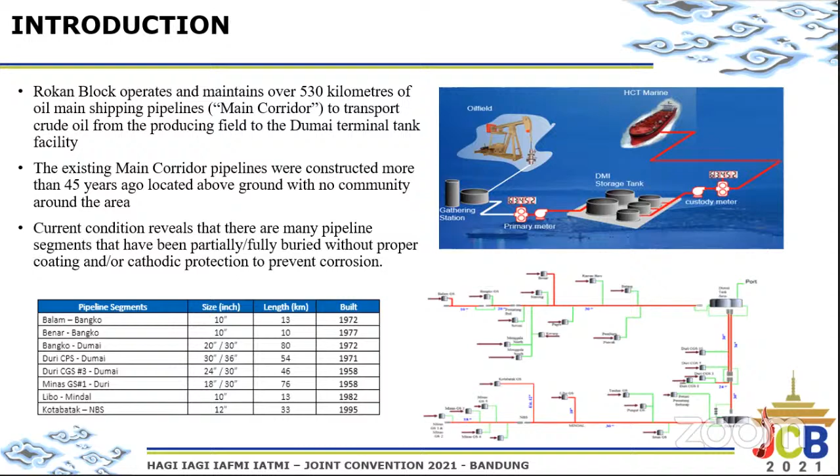A specific problem discussed in this paper is pipeline integrity and operational issues in the main shipping lines. The first is aging pipeline networks. The pipeline is more than 45 years old, as stated before. The second is heavy metal loss due to external corrosion from environmental and soil contact. The third is illegal road crossings. Another problem is pipeline incidents from public road proximity and natural factors, such as land shift, fallen trees, and

erosion. As part of further pipeline integrity problems, inline inspection or ILI and long-range ultrasonic testing or LRUT were conducted on the existing aging pipelines to be used as baseline data. The results indicated some pipeline segments were at high risk due to significant metal loss. We can see in the picture some conditions of the main corridor pipelines: pipeline leaks due to illegal road crossings, corrosion, and also encroacher houses or facilities near the pipeline.

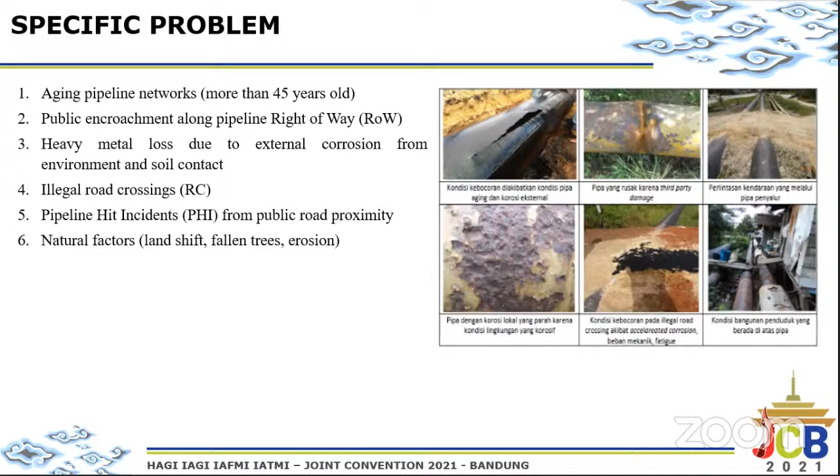With the problems described in the previous slide, by considering the inability to perform full pipeline replacement during the remaining time of Rokan PSC at the time, the Rokan block operator deployed a comprehensive pipeline maintenance or CPM program, which covered all aspects of pipeline maintenance, starting from the inspection program, lifetime analysis, priority ranking, and planning to execution. The main goal of the CPM program was to maintain pipeline integrity at an acceptable level of service. The program focused on activities related to an increased rate of proactive repairs by the sleeving program, road crossing repairs and coating applications, and installing sacrificial anodes and other interim mitigation until pipelines are either replaced

or shut in. As part of the CPM program, the Rokan block operator utilized a Pipeline Integrity Management System or PIMS and implemented risk-based inspection tools to prioritize the asset integrity program. The picture in this slide shows the pipeline integrity flow process. The main pipeline integrity activities, as we can see in the slide, are risk assessment, inspection, monitoring and testing, integrity assessment, and mitigation and repair.

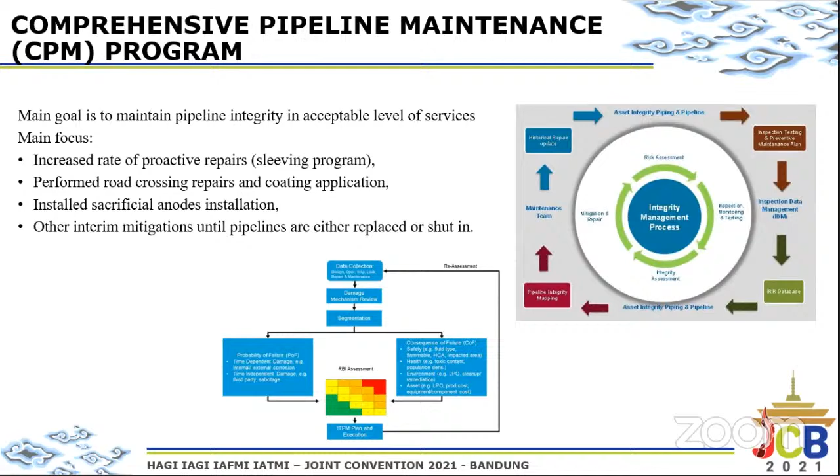This section will describe the CPM program execution. The CPM program was initiated in 2017 to allow safe pipeline operations, reduce the risk of loss of containment, and reduce the risk of social and environmental impact due to pipeline integrity during operations. The detailed objective of each program activity, the repair criteria, and highlighted results related to each CPM program activity will be discussed in detail in these sections. The first program is pipeline repair by sleeve installation.

The objective is to maintain or improve the maximum allowable working pressure or MAWP that supports safe operations. The repair criteria is to address the red and orange anomalies based on the projection of the latest inspection result. We can see in the table the pipeline anomaly criteria based on the metal loss condition and MAWP. For example, a pipeline spot is categorized as a red anomaly if the metal loss is more than 80% and MAWP is less than 1.1 MAWP limit. Total installed sleeves from 2018 until 2020 are around 4,600 pieces, equal to 1.7% of total main corridor length. And these are some pictures of sleeve installation activity.

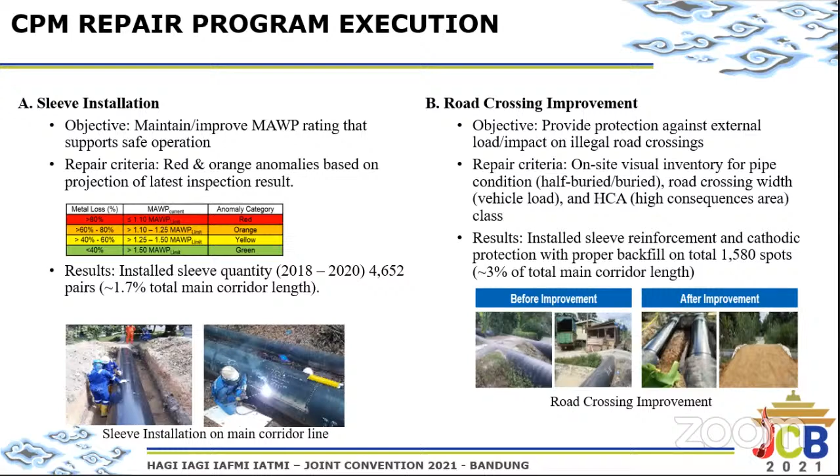The third program is coating application. The objective of coating is to provide protection against external corrosion and mitigate corrosion growth. The repair criteria is based on the projection of inspection results on buried or half-buried pipeline with 50 to 60% metal loss. Total coating application and sacrificial anodes installed until 2020 is around 20 kilometers, equal to 6.2% of total main corridor length.

This is the picture of the coating application activity as part of the CPM program.

The next program is guardrail installations. The objective is to provide protection against pipe hit incidents due to vehicle traffic. The repair criteria is criticality prioritization based on past incidents, road condition, and pipeline positions. Total installed guardrail until 2020 is around 30 kilometers.

The picture shows the comparison between before improvement and after improvement. If there is no guardrail, the truck hits the pipelines, but the right picture shows that because of the guardrail, the truck does not hit the pipeline.

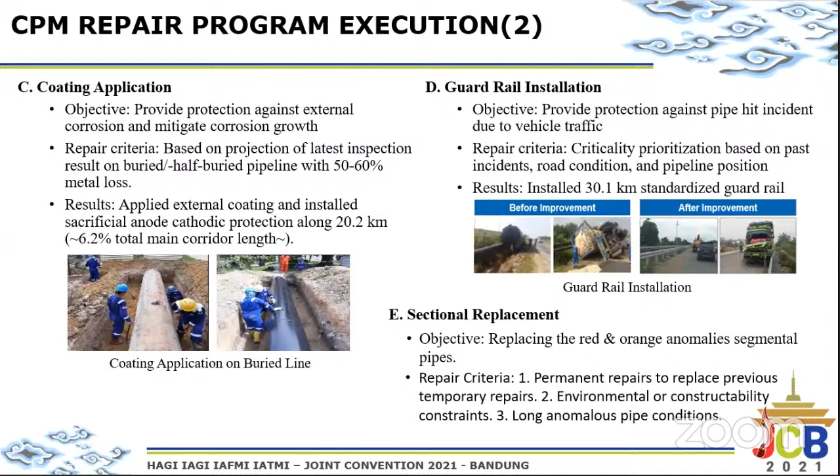This section will summarize the accomplishment of the CPM program from 2018 until 2020 in ensuring safe pipeline operations: MAWP more than MOP, maximum operating pressure, success to extend the pipeline remaining lifetime, to reduce the damage rate from pipe hit incidents, to reduce lost production opportunity, and increase mean time between failure or MTBF.

First, we can see the CPM program succeeded to maintain MAWP above the MOP to support safe pipeline operations. After the CPM program, all main corridor segments demonstrate MAWP improvement in 2019 compared with the projected MAWP without the CPM program. In addition, degradation of MAWP below required operating pressures due to aging pipeline has been avoided.

From the picture of the main corridor anomaly mapping, we can see the reduction of red and orange anomalies in the main corridor after the CPM program.

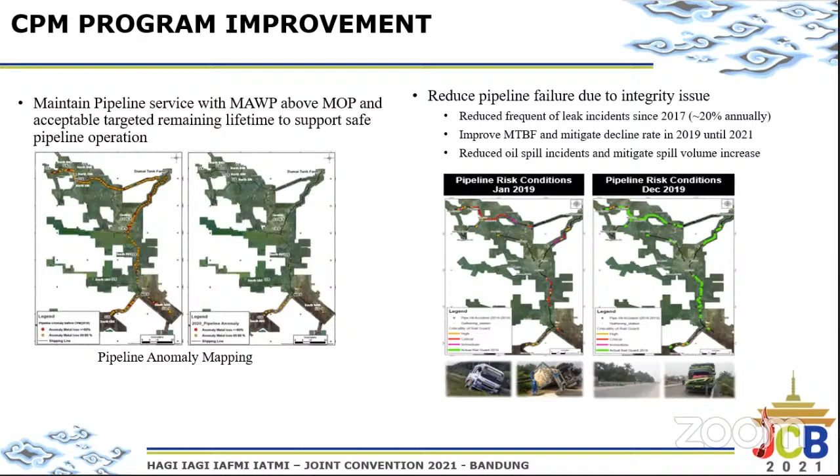This graph shows some results and successes of the CPM program. The first is more flexibility in mitigating congeal events resulting from sustained MAWP, and we can see the reduction of lost potential oil due to congealing. The right picture shows the reduction of the number of damages inflicted on the pipeline from vehicle strikes or accidents, and also reduction of associated repair costs resulting from pipe hit incidents.

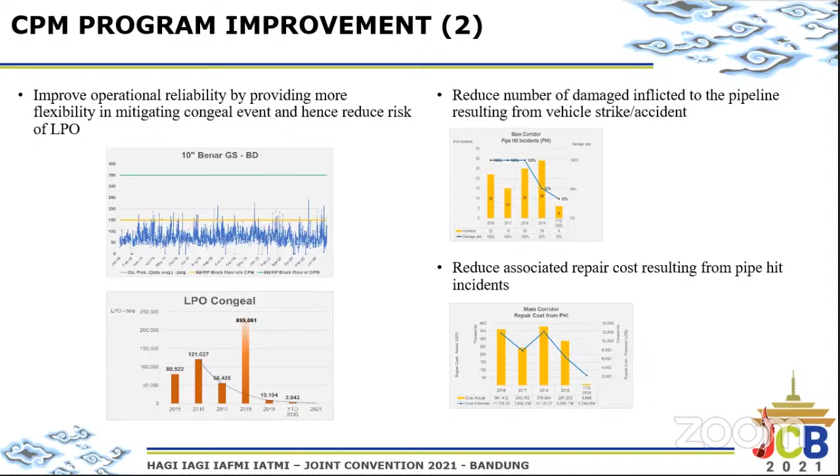These are the conclusions. The execution of the CPM program in the main corridor from 2018 until 2020 has successfully maintained pipeline operation at a safe margin, MAWP more than MOP, maximum operating pressure, extended pipeline remaining lifetime, reduced the damage rate of pipe hit incidents, reduced lost production opportunity, and succeeded to increase mean time between failure or MTBF.

The CPM program provided a fit-for-purpose solution for the aging pipeline condition, given the end of the Rokan concession, compared to complete replacement, with the following specific advantages: significant capital cost savings converted into operational cost, minimizing social risk and increasing the safety factor, preventing lost production with an even greater effect, and generating baseline improvement with good learning for future activities.

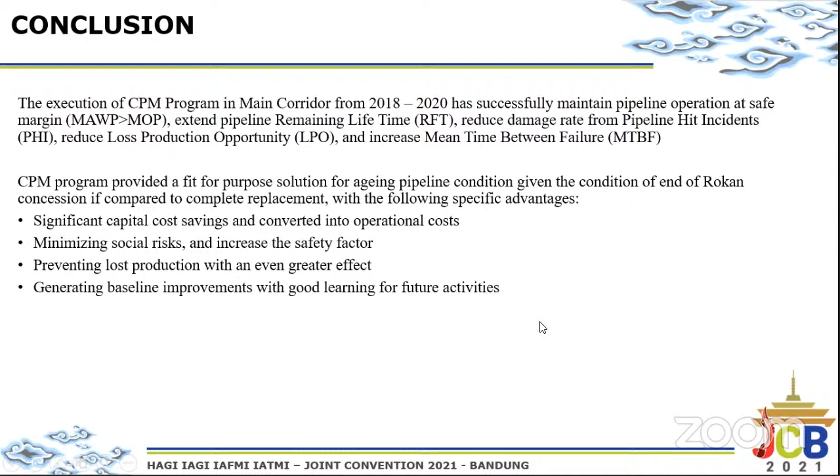That's all for our presentation. Hope this paper will give valuable knowledge as one of the best practices to maintain aging pipelines to keep safe operation and production.

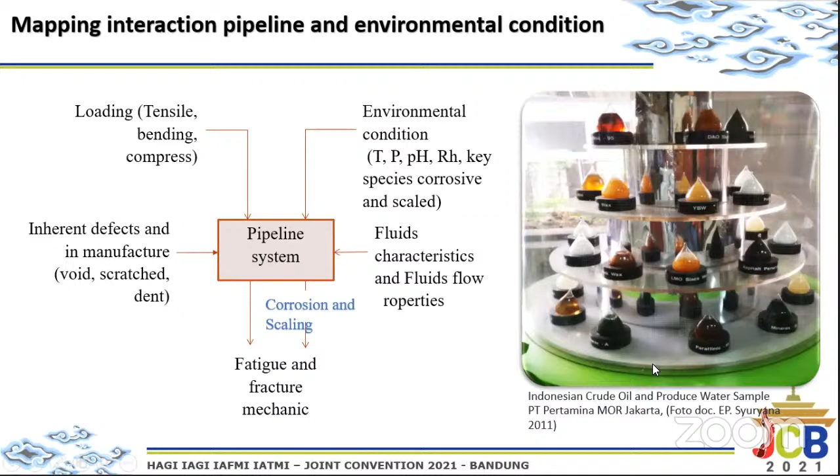We also need to consider the fatigue and mechanical condition like fracture, and also the inherent defects in manufacturing. If we see the steel making process for line pipe material, we also need to consider the microalloying elements, and also the thermomechanically controlled process and other processes. And this is the chemical composition of oil.

And from the system facility for oil and gas production, especially for crude oil production, we also consider the oxygen, H2S, water and chloride species and other conditions. For example, this is from the Minas field. The API gravity is 35.0 and the sulfur content is 0.80. This is sourced from Indonesia, maybe from the area of Pertamina Hulu Rokan, I think. And also from many countries.

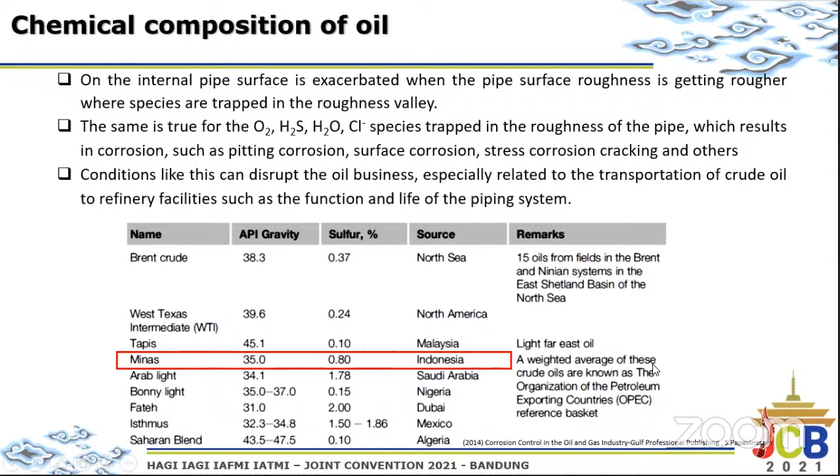In this interaction for the species I mentioned before, for the many characteristics of impurities, first the oxyhydroxide, we can predict the corrosion species from these impurities. Chloride makes FeCl2, and hydrogen the oxyhydroxide type. Oxygen makes Fe2O3, and H2S makes FeS, at lower temperature, rather than the basic steel Fe3C, and CO2 can form FeCO3.

Why can these impurities create conditions for corrosion in piping or pipeline? Many types of impurities can make defects or damage in the piping, the pipeline, or actually in mechanical static equipment also. For example, hydrogen sulfide has many characteristics of cracking. For example, I have found stepwise cracking in an Indonesian pipeline section.

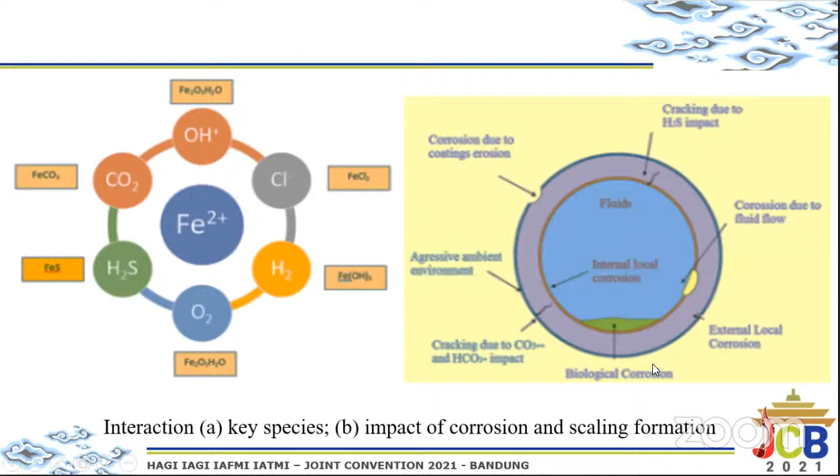There are many other types of corrosion due to the characteristics of the external environment and the internal environment. This detailed illustration I captured from my other presentation. This is why impurities can give defect or corrosion effects. We divide it into characteristics. First is sour corrosion, describing problems with hydrogen sulfide, and sweet corrosion, describing CO2 corrosion.

First, if we have found H2S impurities, they can affect the pipeline body from the internal surface, and the reaction first makes FeS and the second one is FeS2. This is a different characteristic, and they also give a cracking effect to the pipeline body between the internal or external surface.

And CO2, the sweet corrosion: in this reaction, CO2 reacts with Fe, the ferrous material on the internal surface of the piping or pipeline, making a type of corrosion product. This is FeCO3, and this is the characteristic of sweet and sour corrosion.

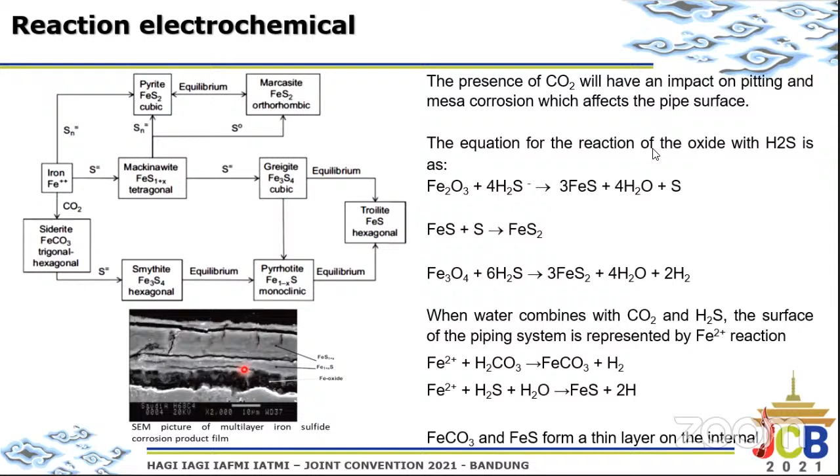And for the illustration of other impurities for CO2, this is how we can predict. I captured this citation from Robert Heidersbach, Metallurgy and Corrosion in Oil and Gas Industry, 2011. This curve can help us in the basic phase of engineering or basic design of engineering. This is a very helpful diagram for predicting the effect on corrosion rate of CO2 impurities in a crude or gas system.

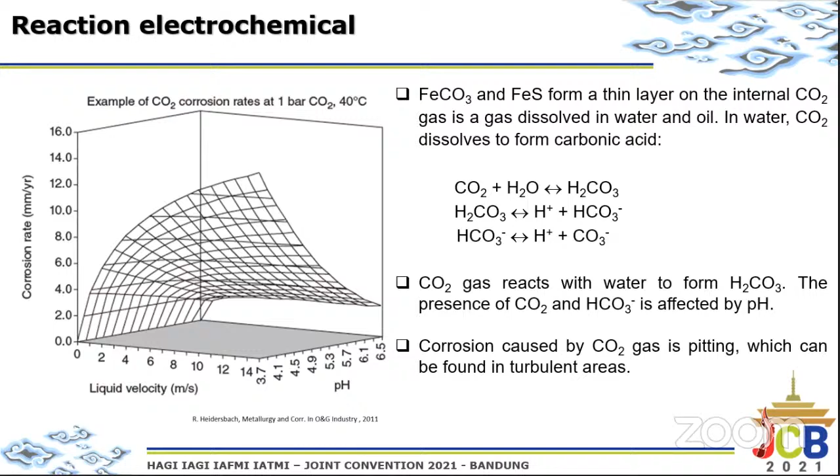This is the electrochemical reaction from the CO2. We can calculate manually, and also you can use this formula from NORSOK M-506, and this is for consideration. We predict the CO2 fugacity and calculate the predicted corrosion rate in MMPY.

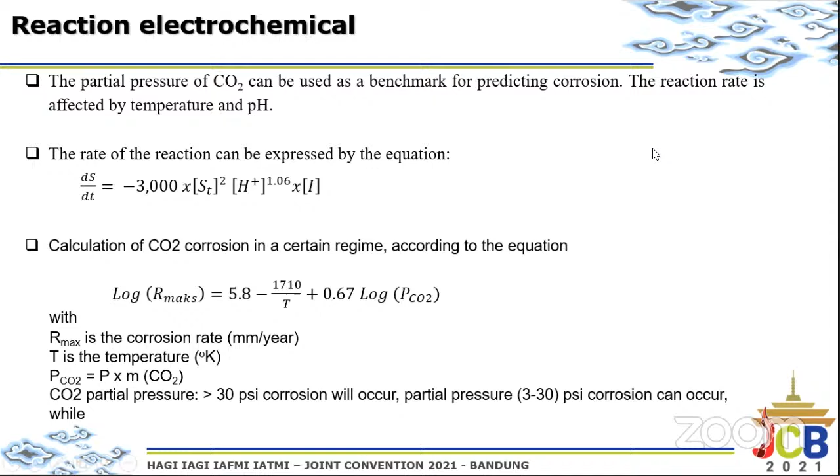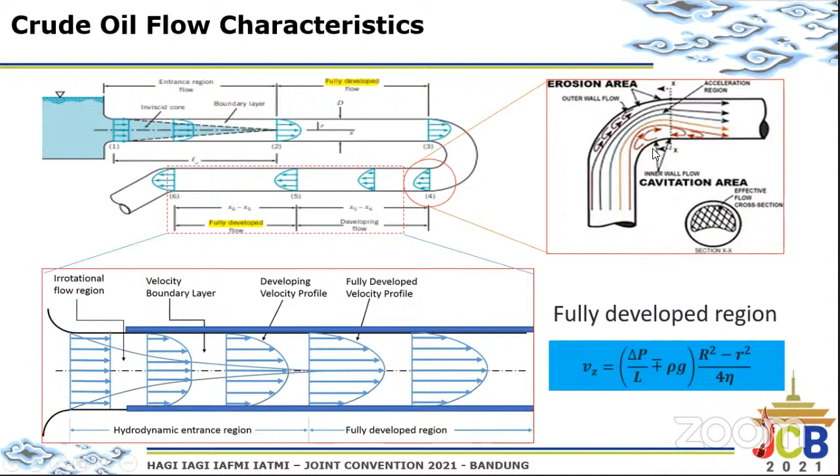This is the development characteristic of flow. We see in the center of the pipeline or piping, the velocity is optimum. And near the surface of the pipeline, the velocity is near zero, as in the formula for the fully developed region. In the visualization, the velocity at the center is higher than at the surface of the pipeline or piping system. With that condition, the scaling tendency may have higher potential at the surface of the pipeline rather than the center of the pipeline internal.

And these are many pictures you can get from the internet, showing many characteristics of piping or pipeline plugging. Maybe we need cleaning pigs, bi-directional pigs, for cleaning this condition, but it is slightly different from the geothermal pipeline system, because the geothermal pipeline system doesn't have pigging equipment, pig launcher or pig receiver, as in gas or crude oil pipelines.

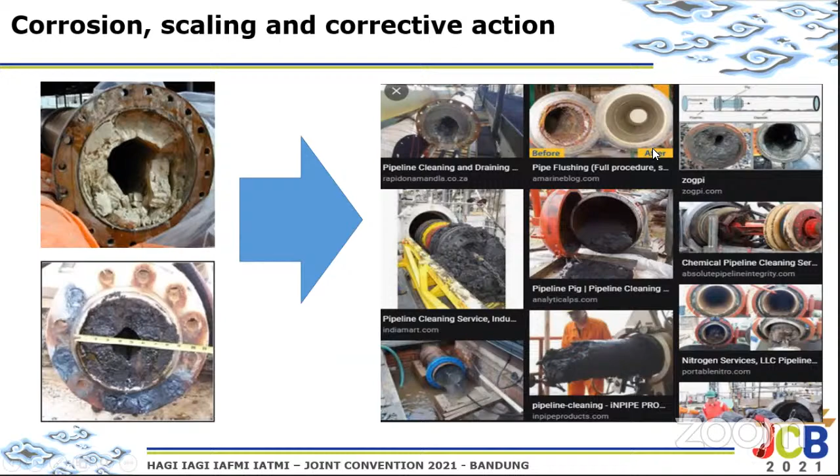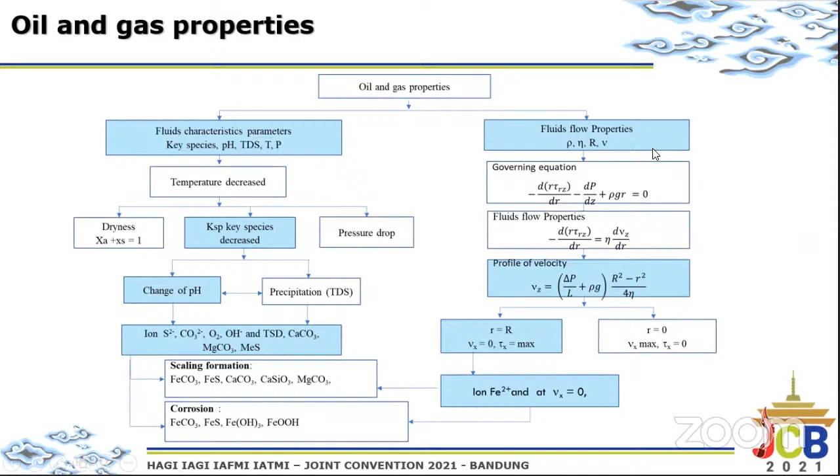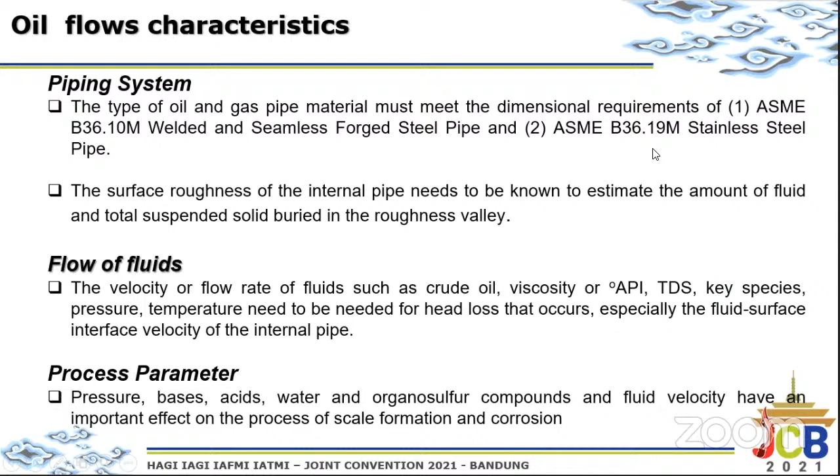Okay, this is an example for scale basis or scale corrosion. We have many types here, and you can find them in lab data from the lab provider. If we have a fluid sample from the well, we have the characteristics and also the quantity or percentage of the scale basis and its potential effect on the surface of the pipeline or piping system. Oil flow characteristics we have discussed before. This is from the piping system, the fluid velocity and process parameters. These are the three we consider to calculate the total scale basis.

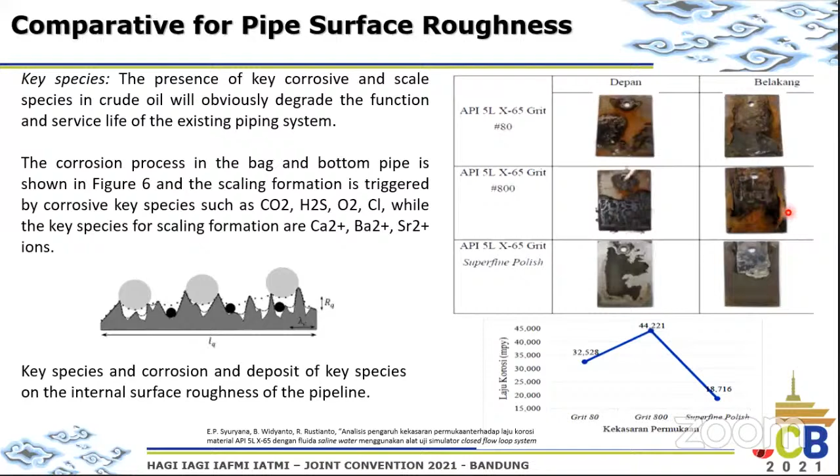Based on what I described before, this is especially for crude oil. We use ASME B31.4, and this is the comparison of the effect of surface roughness with the characteristics of the impurities I mentioned before. Scale basis affects deposits through surface roughness. In our previous research, we compared API 5L X65 grit 80 and the surface characteristic from grit 800, and also superfine polish. This is the characteristic of surface corrosion product. I tested with the team using the corrosion flow loop system.

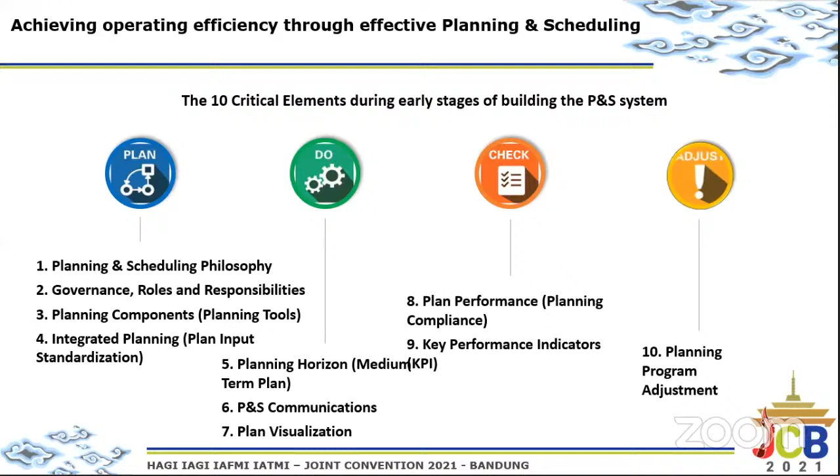Now let's move on to what we discovered to be the most important aspect of building a system, which is focusing on the people. How do we build a strong guiding coalition, a strong team, and how do we use the 5C framework to do this? The first C is care. We need to care about what we are doing here. We need to care about the people. We need to care about the things we do. Then we build trust through connecting with people.

And next question, how do we connect with people? We do that by spending quality time with them, with the managers, and of course, with the planners. We do informal support dialogues and sessions. And after that, we create clarity by managing expectations and providing knowledge. How do we provide knowledge? What we did was we created instructional videos on oil and gas operations, because that's always important.

And then we show commitment. We don't demand commitment. We show commitment by providing continuous support. We do one-on-one checkpoints with asset planners. We provide them guidance and we help them with whatever their concerns and needs are. And behind the scenes, we also communicate the asset planners' expectations with the operations managers, their managers.

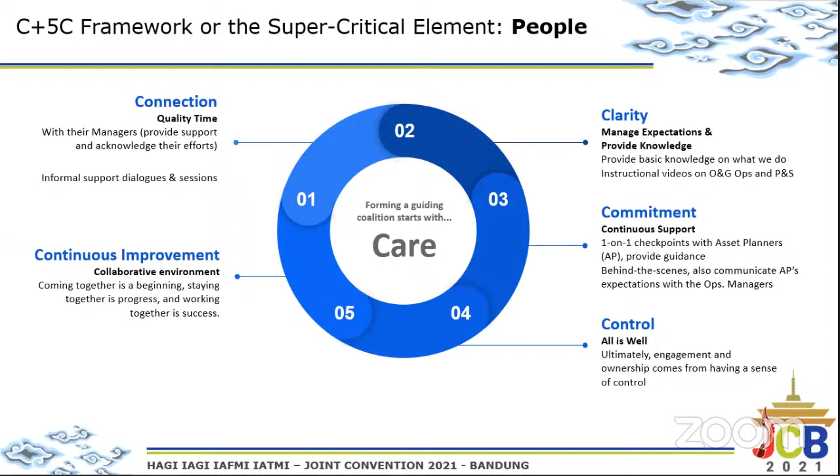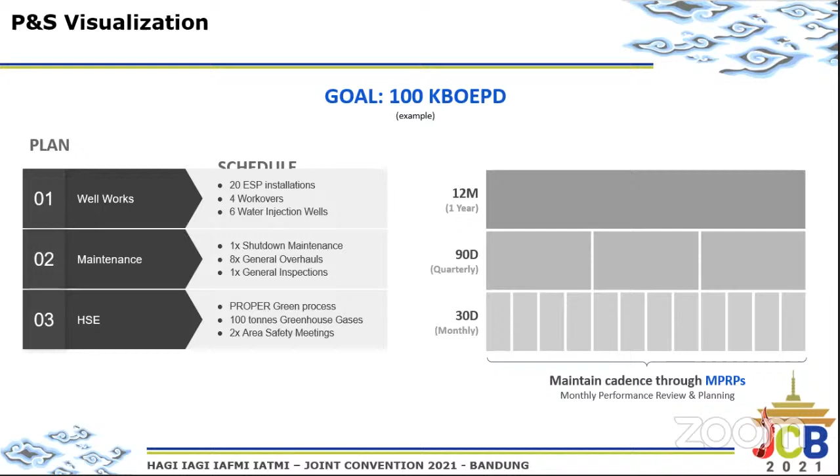By doing this, we create contribution to the company in terms of achieving organizational goals and objectives. Despite COVID-19, of course, limiting mobility of personnel, and all these effects and shifts in short, medium, and long-term plans, we also contributed by establishing strong governance through developing a comprehensive guideline on planning and scheduling, which is consistently

implemented organization-wide. We also developed 12 planners who are the heroes of our planning and scheduling efforts. And in the process, we created a strong collaborative community focused on collective and continuous improvement.

Finally, our key learnings. Whenever you want to build a system, you need to first identify critical elements. Take some time to learn and identify the most important elements for the early stages and never ever ignore focusing on developing the people. Always start there. We don't try to manage them, we develop them. When we develop people, it creates more engagement and more ownership.

Because, guess what? All these things that we are doing, the system, the governance, will be executed by the people. So let's focus on that. And finally, always have a method to keep cadence of accountability. Keep a solid rhythm of accountability through periodic checkpoints. Review our performance and plan how to keep on improving, how to be better.